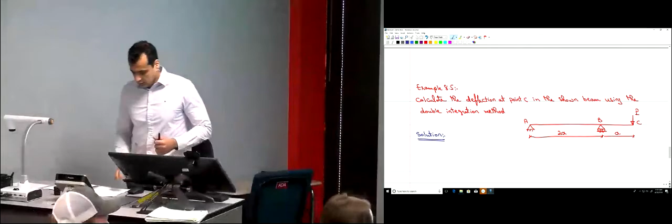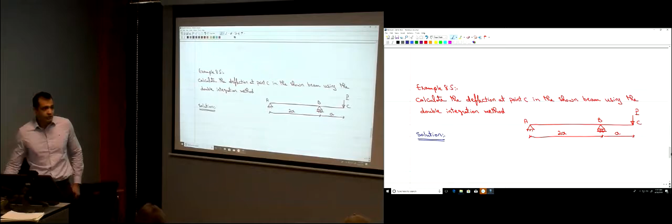Okay, so good morning, everyone. Today, in our last lecture, we're going to finish how to calculate the deflection in beams. Last time we started the double integration method. Today we're going to solve one extra example on the double integration method, and then we're going to learn another method for calculating the deflection called the method of conjugate beams.

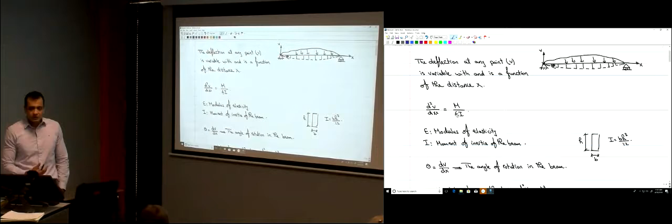So what's the double integration method? Just a reminder, the double integration method is based on this equation: the second derivative of the deflection V at any point is equal to M divided by EI. So you write the equation for the moment, divide it by EI, integrate it once, and you find the rotation theta, the slope, at any point. Integrate once again and you find the equation that gives you the deflection at any point. We did this for two examples last time, and today we're going to solve another example using the double integration method.

So what are the steps? First step is writing the equation for the moment. To write the equation for the moment here, is it just one equation that you need to represent the moment at any point? It's actually two. You need two equations, not just one. Why? If this is the distance x1, any section here has a certain equation, but over here you have a different equation, because here you have a reaction that has to be added. So let's start by finding those reactions first.

So here you have a reaction AY, here you have BY. Definitely there is a horizontal reaction as well, AX, but AX is not going to give any moment, and it's actually 0. So taking the summation of the moments about point A equal to 0, you have here P times its distance to point A, which is 3a, and this should be equal to BY times its distance to point A, which is 2a.

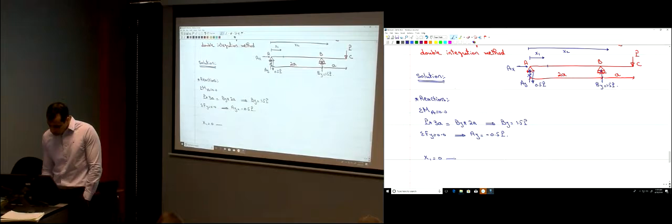So now, let's write the equation for the moment. As we said, you have two locations. For x1 equal to 0 to 2a, you're going to have an equation. And then for x2 equal to 2a to 3a. This is from point A to B, and here this is from point B to point C. You have two different equations. So which equation are we going to use?

Here, what's the equation for the moment from A to B? It's this force, the 0.5P, times its distance x1. So it's negative 0.5P x1. That's the equation for the moment. What about the equation from B to C?

Taking a section over here, it's again the same, 0.5P times x2, so negative 0.5P times x2, but now we have the reaction By, that has to be multiplied by its distance to that point. So we have 1.5P times its distance, which is x2 minus 2a. This distance over here is x2 minus 2a. So now I have two equations for the moment.

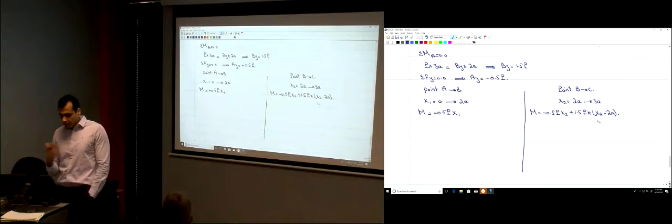So here, theta is equal to the integration of M dx. So it's the integral of negative 0.5Px dx. So how do you integrate this? It's negative 0.5Px squared divided by 2 plus C1, right? And then you integrate it again. V, the deflection at any point, is the integration of that again. So it's negative Px cubed, and with the 0.5 and the half, that's 1/4 times 3, so this is over 12, plus C1x plus C2.

So that's the equation that gives you the deflection at any point. I just forgot something here. It's EI. I have to divide by EI. So here we have 1 divided by EI multiplied by everything. So that's the deflection at any point.

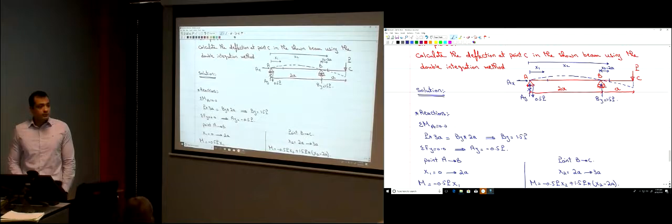When this beam deflects, this point is going to move down like this, and here there is a support that prevents the beam from moving, and here there is a support that prevents the beam from moving. So this is the expected deflected shape. How much is the deflection at point A? There is a support, so it's 0. And the deflection at point B? 0. So those are the two boundary conditions that I'm going to use.

So at x equals 0, that's point A, V is equal to 0. Point A is a support, so it prevents the deflection. So let's plug those numbers. Put V equal to 0 and x equal to 0. So you're going to have just C2. So C2 is equal to 0.

So now the equation for the deflection, V, is 1 divided by EI multiplied by negative Px cubed divided by 12 plus C1x, since C2 is equal to 0. Now I use the second boundary condition.

The second boundary condition at x equal to 2a: the deflection is equal to 0 as well. Why? Because you're at point B where you have a support to prevent the vertical deflection. At point B there is a support. So let's just plug the deflection equal to 0 and then just put x equal to 2a.

So this is 2a cubed divided by 12 plus c1x, which is 2a. So now from this equation you can solve for c1, and c1 is going to be equal to Pa squared divided by 3. That means that the deflection at any point from point A to point B is 1 divided by EI, negative Px cubed divided by 12 plus C1, which is Pa squared divided by 3, times x. This is the equation for the deflection at any point from point A to point B.

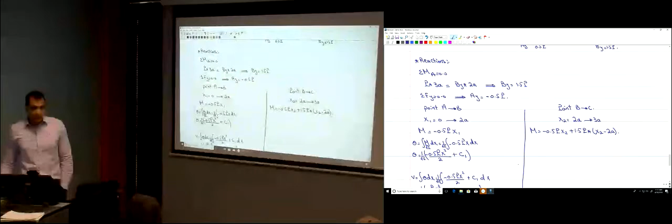So all what we did over here was kind of useless, right? You didn't need all of this. So actually it's not useless. We're going to see that it's not useless in a moment, but it seems useless now. Actually what you need to do is integrate the equation from point B to point C. So now we have this moment. We need to integrate it.

So theta is the integration of M divided by EI dx. This is theta in the segment from point B to point C. So this is equal to 1 over EI times the integral of negative 0.5Px plus 1.5P(x2 minus 2a). I just put x instead of x2, dx.

So 1 divided by EI, and let's do the integral here. We have Px squared divided by 2, so that's 4. Negative Px squared divided by 4 plus 1.5Px squared divided by 2, and then minus 3Pax. That's the integral over here. Anything left? Anything missing? Constant. So plus C3, a third constant.

And then let's find the deflection. The deflection is the integration of theta dx. So that is equal to 1 divided by EI, and then the integration over here. Let me write it on a new line. 1 over EI, and then let's integrate it term by term. So negative Px cubed divided by 12, plus 1.5 is just 3 divided by 2, so it's 3 divided by 4, and here we have Px cubed divided by 3. So the 3 cancels with the 3, minus 3Pax squared divided by 2, plus C3x plus C4.

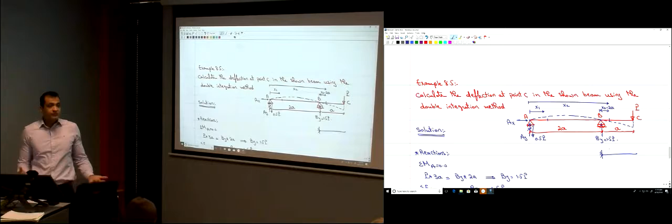Theta at B equals 0? Why? That was when you had a cantilever beam. When we had a cantilever beam, here theta is equal to 0 and the deflection is equal to 0. But this is not a cantilever beam, okay? You don't have a fixed support over here, so the beam is allowed to rotate. There can be an angle of rotation over here, theta. It's not equal to 0.

What's the other boundary condition? If someone says that correctly, I will give him 1 bonus point. But don't look at the book. The deflection at B is 0? Is that what you're looking for? The deflection at B, yeah, we used this already. The deflection at B is equal to 0. You need another boundary condition. What would that be, from B to C? Some piece of information that you know. The slope, the rotation. Is the rotation anywhere here known?

X2 to 2a. X2 minus 2a. It's not between there, is it? X2 minus 2a. This is the point here. What about it? Do we not know? I guess we don't. Theta times LBC. Is it theta times the length of BC? So theta times the length of the segment gives you the deflection over here. You don't know the deflection over here, but no, again, this is not correct.

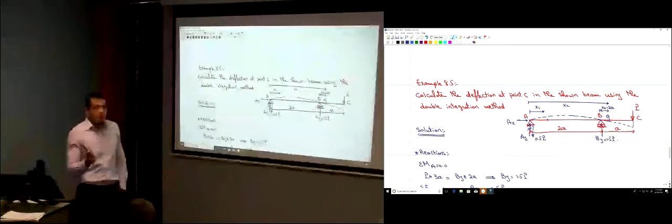My question is, do you know the rotation theta at any point? It doesn't necessarily have to be 0. How would I know this? It's point B. Point B is common between the two parts. I already know the equation for the rotation here. I can use it to find the rotation at point B and then use it here as the boundary condition. Whatever the rotation at point B that I get from segment AB is equal to the rotation in segment BC. It's the same point. I told you this part seems useless, but now I'm going to use it.

I'm going to use this equation for theta. So here, the second boundary condition is theta B from the left part is equal to theta B from the right part. How much is theta B from the left part? It's this equation: 1 divided by EI, multiplied by negative Px squared divided by 4 plus C1, which we found as Pa squared divided by 3. And at B, x is equal to 2a, so I have to substitute x equal to 2a in this equation.

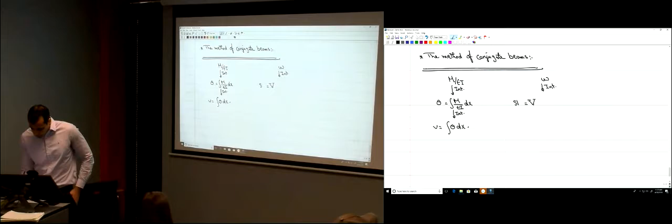Sure. Exactly. So when we had W, a load on the beam, when you integrate it, you find the shear, capital V here. Don't mix those together. The capital V is not the deflection. This is the shear. It's just the integration of negative W dx, right? And then you integrate it again, you get the moment M, which is the integration of V dx.

It's the same process, exactly the same thing. If you know M, you integrate it, you find theta. If you know W, integrate it, you find the shear. You know theta, you integrate it, you find the deflection. You know the shear, you integrate it, you find the moment. It's the same relationship, okay?

So, since it's the same relationship, what if I treat the moment as a load on the beam and draw the shear for this new load? This shear represents theta. If I draw the moment for that new load, I'm getting the deflection, right? So there is an analogy between them.

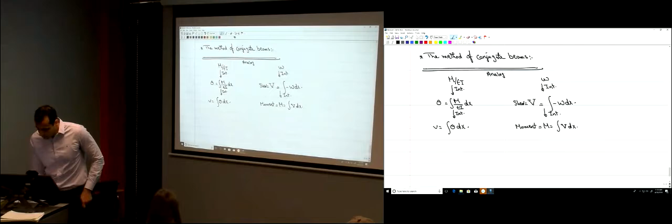Assume that the bending moment that you have is a load. Then draw the shear for that load, you're finding theta. And then find the moment for that load, you're going to be finding the deflection. So that's the method of conjugate beam. Let me write this here.

So draw M divided by EI, and then consider this bending moment drawing that you have as a new load on a new beam. We're going to call this a conjugate beam. So we're having a new beam.

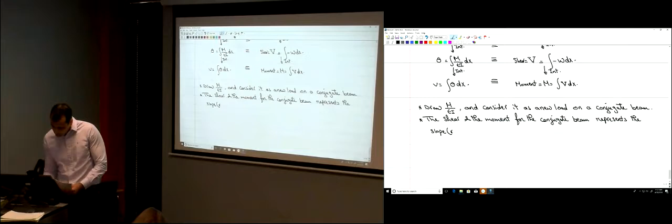And then the shear and the moment for the conjugate beam represent the slope or the rotation theta and the deflection v. It's that simple. Okay?

So let's see an example. We're going to solve two examples. The first example is example 8.14 in the textbook. We have a simple beam; we'll start with the simplest thing. At this point we have a load of 8 kilonewtons, and the dimensions are 9 meters and 3 meters. These are points A, B, C. We're given E is 200 gigapascals, and I is 60 times 10 to the power 6 millimeters to the 4.

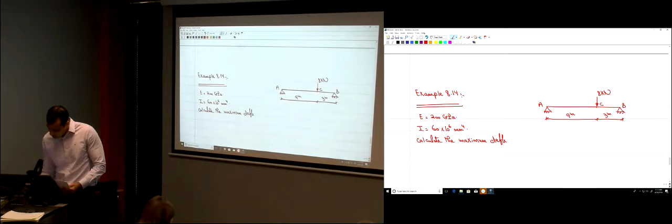And we're required to calculate the maximum deflection in the beam using the method of conjugate beams.

So how can we do this? What does the method of conjugate beam say? It says draw the bending moment diagram. That's the first step. And then consider this bending moment diagram as a load. So let's start with the first step. We need to draw the bending moment diagram for this beam.

How to draw the bending moment diagram for this beam? I'm not interested in drawing the shear, I just want to draw the bending moment diagram here. How can you draw the bending moment diagram? You've learned this throughout the semester. You have to find the moment at the critical points. What are the critical points? A and B, the start and the end of the beam. How much is MA and how much is MB? 0. And what else? What are the other critical points?

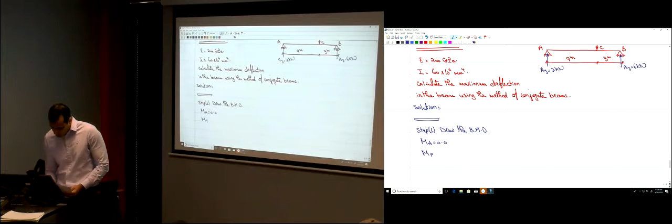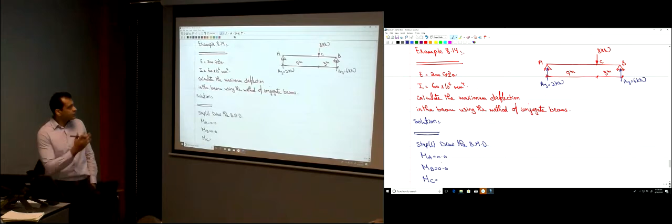So step 1, draw the bending moment diagram. To draw the bending moment diagram, we're calculating the moment at the critical points. MA is equal to 0, MB is equal to 0, and MC. Can someone tell me how much is MC? You take a section at point C and then calculate it from the left part or the right part. How much is MC? If you take that long to find MC, that's a problem. How much is MC? 18.

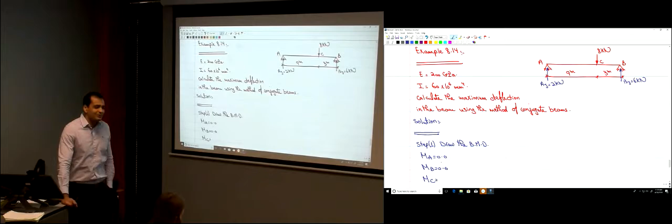You take a section over here, so it's 6 times 3. Or you take a section and consider this side, it's 2 times 9, it's 18. So MC is 18 kilonewton meters. So now let's draw the bending moment diagram. Here the moment is 0, here it's 0, at point C it's 18 kilonewton meters. This is the bending moment diagram.

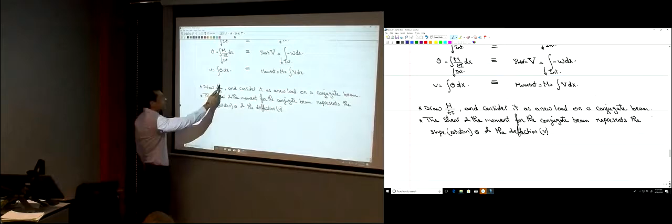Now, look, the whole method of the conjugate beam is described in those 2 lines. Draw the moment and divide it by EI. Did we draw the moment? Yes, we just have to divide it by EI. It's the same moment, but just 18 divided by EI. And then consider it as a new load on the conjugate beam. So this is not a bending moment anymore, this is a load applied on a new conjugate beam, not the real beam. We're done with the real beam.

Once we have the conjugate beam, the shear for this conjugate beam represents what? Is it a shear? No. The shear is the rotation, theta. The moment for this conjugate beam, is it a real moment? No. It's the deflection. That's the method of the conjugate beam. The only thing you have to take care of: when we did this analogy, with M divided by EI, there was a negative sign here and no negative sign over here. So M divided by EI has to be equivalent to negative W.

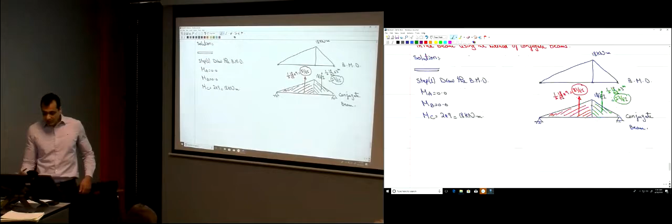Now I have this beam with those 2 loads. Can you tell me the distances of those loads? How much is this distance? 6 meters. And how much is this distance?

2 meters. So how much is this distance? The total length of the beam was 12, so this is 10 meters. Okay? Now we have new reactions. We have a reaction here, AY and BY. Do you know how much is AY and BY?

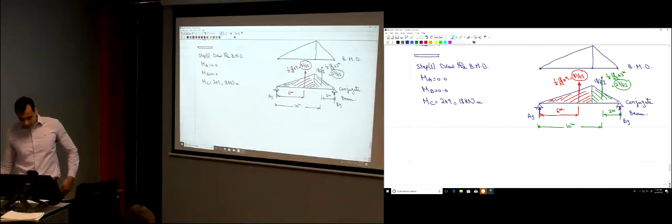Someone would say, yeah, we calculated this before. It's 2 kilonewtons and 6 kilonewtons. No, that is a completely different beam. That's the real beam. Now we're talking about the conjugate beam. You have to find AY and BY on the conjugate beam. Okay? So just take the summation of the moments about point A. Okay? So now just to be precise, let me write this so that you can study from it.

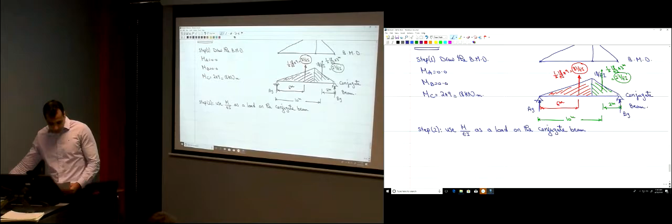Step 2, okay? Use M divided by EI as load on the conjugate beam, okay? So taking the summation of the moments about point A equal to 0, you have 81 divided by EI times 6 plus 27 divided by EI times 10 minus BY. Let me put it like this so that it's downwards and downwards. So minus BY times 12 equal to 0.

So BY is equal to 63 divided by EI. So this is 63 divided by EI. And then the summation of the forces in the y direction is equal to 0, so you can find AY. So AY is going to be 45 divided by EI. So now I know how much is this. It's 45 divided by EI. Okay? Those are the reactions on the conjugate beam. Now, let's see step 3. What's step 3 and step 4?

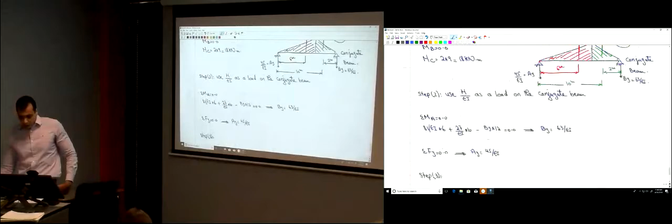The shear on the conjugate beam is the slope, the rotation. Okay? So let's draw the shear force diagram. So here the slope theta is the shear. The shear force diagram here represents theta. Okay? So how would you draw the shear force diagram? You start from the left, okay?

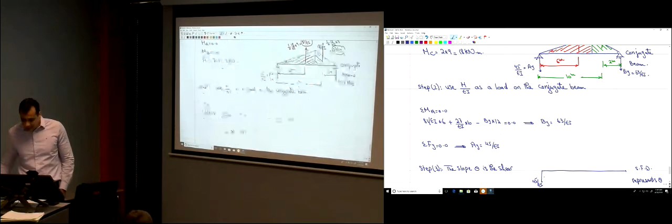AY is going downwards, it's 45. You go down, 45 divided by EI. And then you have this load going up, okay? How much was it? It's 81. So I'm going to go from 45 up, 81, and then I'm going to go up again with 27, okay? And then here I'm going to go down with 63 divided by EI. That's point B here. This is how you draw your shear force diagram.

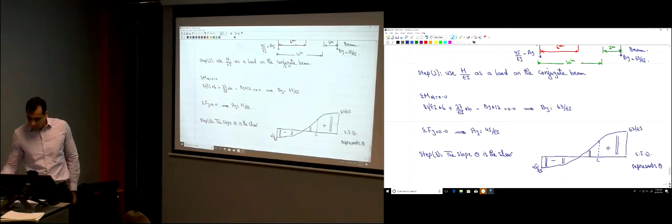Now, if I ask you, how much is the rotation at point A? This beam would deflect like this, right? There is an angle of rotation here, theta A. There is an angle of rotation here, theta B. How much is theta A? How much is theta B? Theta A is the shear at point A on the conjugate beam. So it's negative 45 divided by EI. That's theta A. How much is theta B? It's this value, 63 divided by EI.

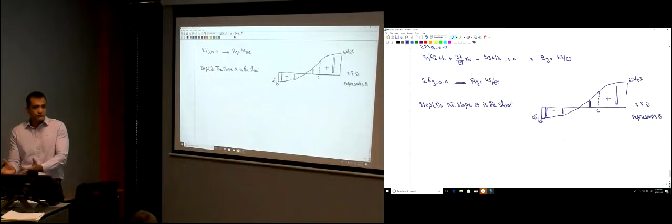How much is theta C? This thing. Okay? So now, this is the rotation. If you want to find the slope at any point, just find the shear at that point, and that's it. And what about step 4? The deflection V is the moment.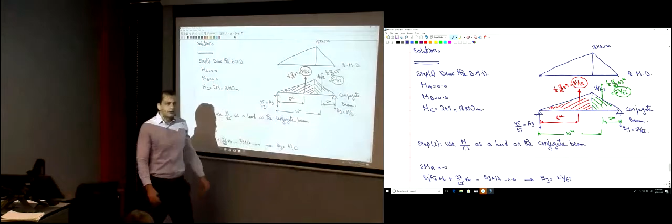Okay? So how would the bending moment look like? The bending moment for the conjugate beam. You have a beam with those loads applied. The moment here is 0, the moment here is 0, right? Would it increase or decrease? From the shear, you have negative shear, so it's going like this. And here you have the shear equal to 0. So here you're going to have the maximum bending moment, and then it's going to decrease.

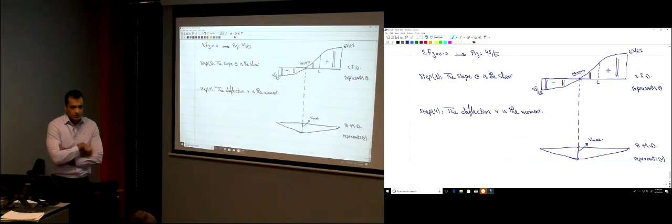So here you have M max, or I'm going to call it V max, the maximum deflection. Where would the maximum deflection happen? Where theta is equal to 0. So where's that point where theta, or the shear on the conjugate beam, is equal to 0? That's where we find V max. Is it at point C? Is it right at the middle of the beam? How can we find the point where theta is equal to 0?

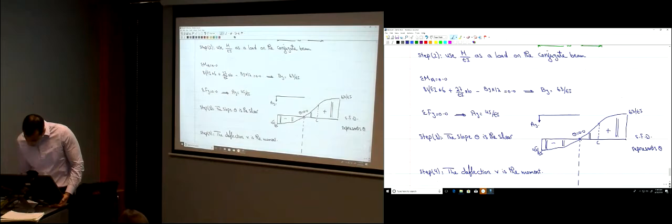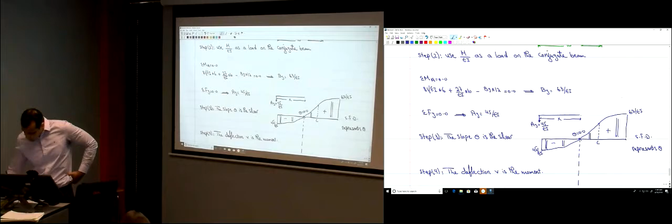Let's take a section at that point. So here you have AY, which was equal to 45 divided by EI. I don't know the distance from point A to the point where theta is equal to 0. Okay? We had a load. How much is the intensity of that load at that point? The intensity of the load at point C was 18 divided by EI.

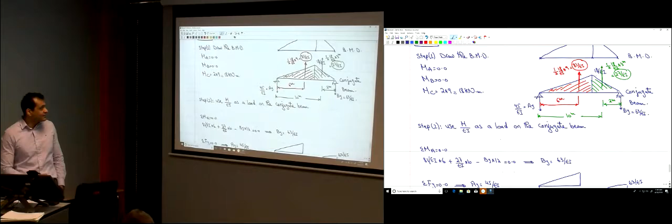So at point C, the intensity is 18. This distance is 9. So if we're at the distance x, how much would the intensity be? 18 divided by 9 multiplied by x. So the intensity over here is 18 divided by EI divided by 9, multiplied by x. So the intensity is 2x divided by EI.

Okay? Now, how much is this load? This load is equivalent to a load that is going up, and it's a triangle load, so it's 1/2 the base times the height. So 1/2 the base. How much is the base distance? X. And how much is the height? 2x divided by EI. So that's the load over here.

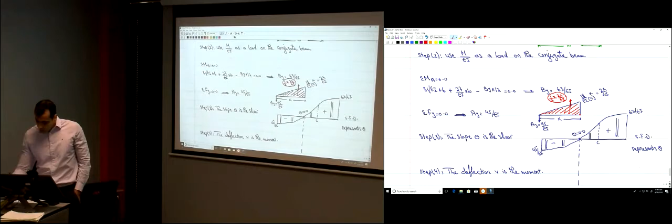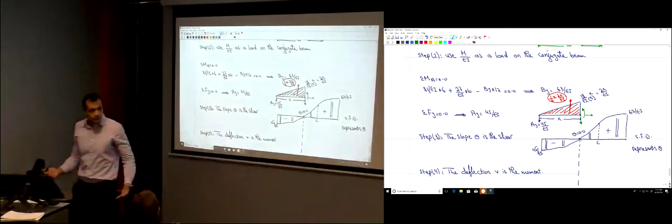Okay? I took a section over here at this point. So there is a shear force, there is a moment, and there is a normal force, right? At this point, how much is the shear? 0. For this shear to be 0, those two forces have to be equal and opposite in magnitude, right? So at the point where the conjugate shear, not the real shear, the conjugate shear is what? Is theta, okay? Is equal to 0, the deflection is the maximum.

So just equate those two forces. AY, which is 45 divided by EI, has to be equal to that force, which is x squared divided by EI. So therefore x is equal to square root 45, so it's 6.71 meters. That's the point where the maximum deflection is going to be. Okay?

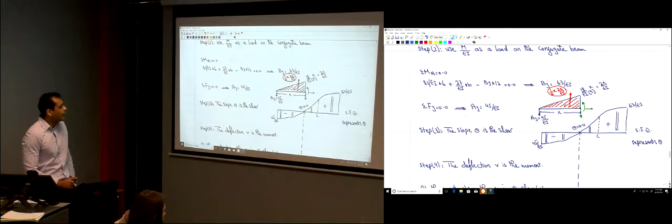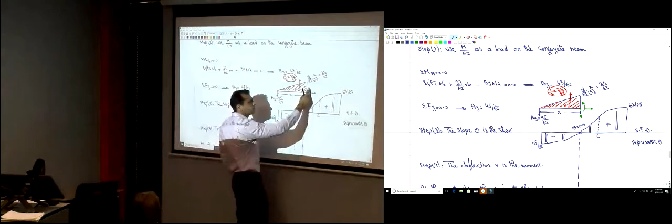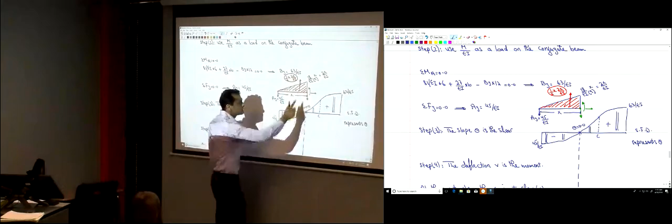So now, I know the location. I need to find the deflection at that point now. What's the deflection? The deflection is the moment. Can you find the moment at that point? Can you find how much is this moment? 45 times x, okay? It's negative plus this force, which is x squared divided by EI times this distance. How much is this distance? One-third x.

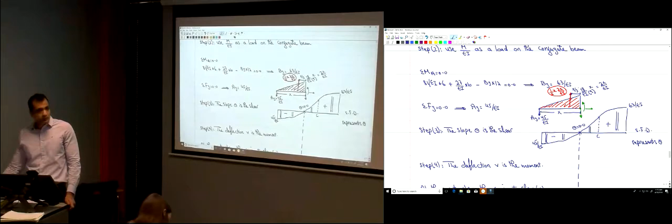Okay? So now, M maximum on the conjugate beam is equal to the maximum deflection. I'm going to call it Vmax. So Vmax is equal to negative 45 divided by EI times the distance x, which is 6.71 meters, plus the force, which is x squared divided by EI times x divided by 3. So it's negative 201.2 divided by EI kilonewton meter cubed. Okay? That's the maximum deflection.

So Vmax, the only step left here is how much is EI. So here this unit is kilonewton meter cubed. E was given in the problem statement, it's 200 gigapascals. So I have to use the same units here. What's a gigapascal? It's 10 to the power 9 pascals. What's a pascal? It's Newton per meter squared. I cannot use Newton. I want to use kilonewton. So I'm just going to divide by 1,000. So instead of multiplying by 10 to the power 9, I'm just going to multiply by 10 to the power 6, to change the gigapascals to kilonewtons per meter squared. So that now is in kilonewtons per meter squared times I, the moment of inertia.

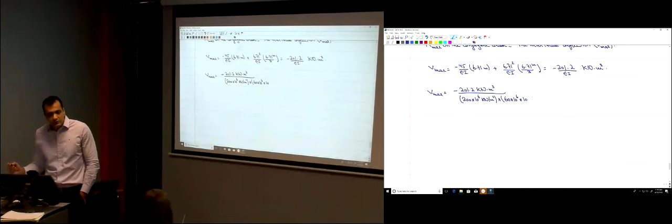The moment of inertia was given as 60 times 10 to the power 6 millimeters to the 4. Can I use millimeters to the 4? Are the units consistent? No, I have to use meters to the 4. So how to change from millimeter to meter? Divide by 100. But now I'm changing from millimeter to the power 4 to meter to the power 4. So I'm dividing by 100 to the power 4. So 10 to the power negative 8. Just multiply by 10 to the power negative, from meter to millimeter, this is not 100, this is 1,000. So 1,000 to the power 4, that's 10 to the power 12. Okay, so 10 to the power negative 12.

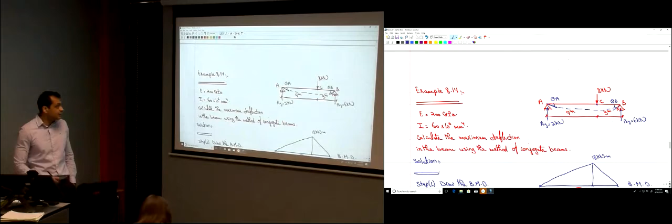So now we're going to have the deflection equal to negative 0.0168 meters. Or multiplying by 1,000, it's negative 16.8 millimeters. That's the maximum deflection. The maximum deflection is not at point C. As you see here, the maximum deflection was not at point C. You had to find the location for the maximum deflection where the shear is equal to 0. Which shear? The shear on the conjugate beam. Any questions?

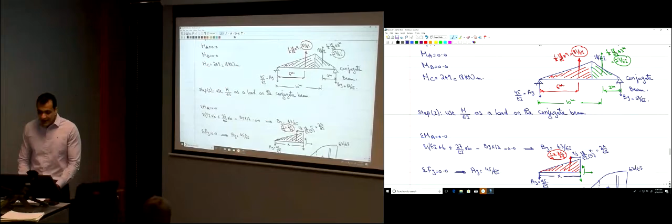Okay, so now, a very, very important topic, before we solve the other example. When we drew the conjugate beam, the real beam was a simply supported beam, and we drew a simply supported conjugate beam. So does the conjugate beam always look the same as the real beam? No. There is a table that tells you what the conjugate beam looks like. So let's see this table. So now, what does the structure of the conjugate beam look like? So here, there is this table. I'm going to give it to you on the test, by the way. So the real beam and the conjugate beam.

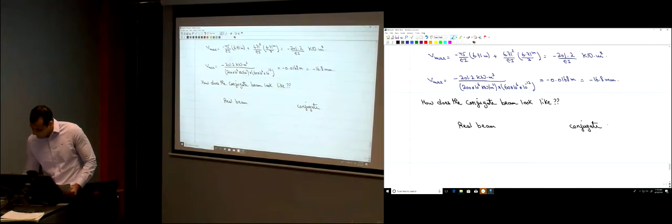If you have a pinned or roller support at the end of the beam. It has to be at the end of the beam, okay? Then in the conjugate beam, it's going to remain the same, okay? Pinned or roller support at the same location. So that's the first case here.

And then, if you have a fixed support in the real beam, on the conjugate beam that becomes a free end. Why is that? Because when you have a fixed support, how much is theta at the fixed support? How much is the deflection? 0. So the moment and the shear on the conjugate beam have to be 0. How would you ensure that? If it's a free end, the shear here is going to be 0, and the moment here is going to be 0. It has to be a free end on the conjugate beam. Okay?

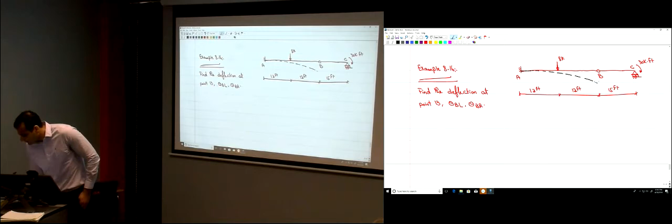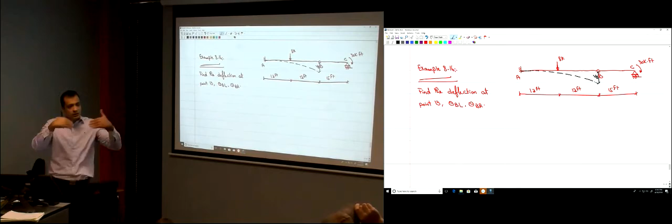It's the same point. How come there are two different rotations at point B? Because there is an internal hinge. When this beam deflects, it's fixed over here, and then it can deflect like this. So this is vB, the deflection at point B. At an internal hinge, both parts can rotate independently. So here you have theta B left, and here theta B right. Completely different angles on both sides, because the hinge allowed this to happen.

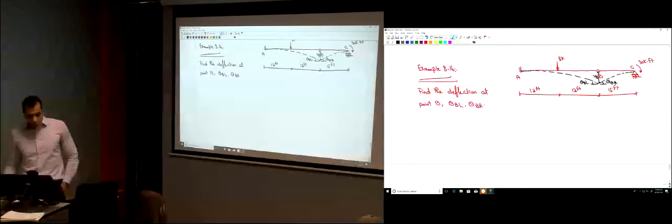So now, how can we do this? Using the method of conjugate beam. What are the steps? Draw the bending moment diagram, consider it as a load, put this load on the conjugate beam. The shear for this conjugate beam is the rotation, the moment is the deflection. That's it. So step 1 here, draw the bending moment diagram.

To draw the bending moment diagram, I'm going to draw the free body diagram first for each part. Here I have 8 k. This is a fixed support, so there is Ay, there is MA, and there is Ax, which is going to be 0. Here we have a vertical force By, and here a vertical force Cy, and this is 30 kip-feet. So here we have a By that is equal and opposite to that By. This is the free body diagram for each part. I just broke it at the hinge.

Now solving over here, taking the summation of the moments about point B equal to 0, you're going to find CY. So CY is going to be 30 divided by that length, which is 15, so it's going to be 2K. And then the summation of the forces in the Y direction equal to 0, you're going to find BY, it's equal and opposite to CY, so it's 2K as well. And then this one is the reverse of it, okay?

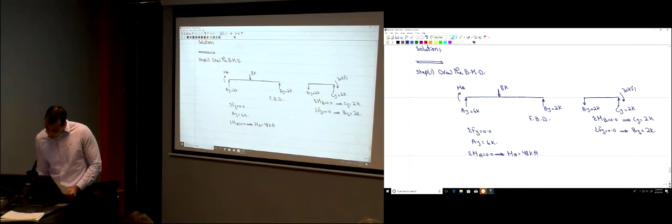And then here the summation of the forces in the Y direction is equal to 0, so AY is equal to 6K. And then the summation of the moments about point A is equal to 0. You're going to find MA is going to be equal to 48 kip-feet. I'm just finding the reactions, nothing more than this, okay?

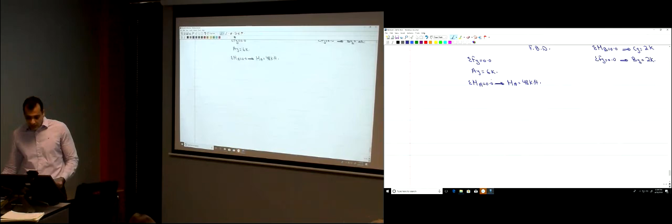Now I would like to draw the bending moment diagram. How would I draw the bending moment diagram? Find the moment at the critical points. I'm going fast here because we're just repeating the steps that we did earlier many times. This is point A, B, C. What are the critical points here? There is point D here, where there is a load applied.

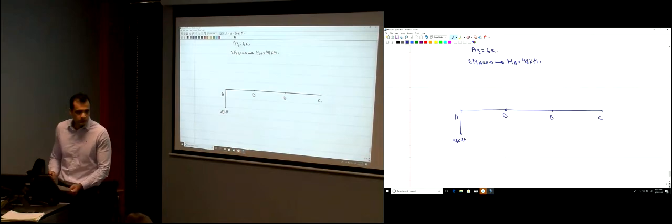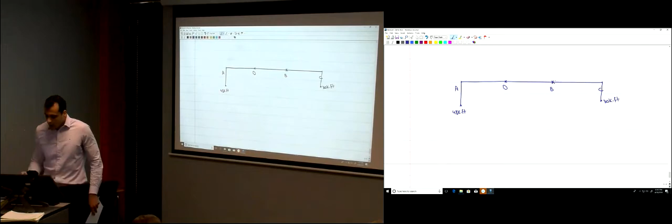So the moment at point A is negative 48. The moment at point B, there was a hinge, so the moment here is 0. Point C, you had a concentrated moment here of negative 30, so MC is negative 30, it's not 0. So negative 30. And here it's 0. So from B to C there is no load, so you have a straight line.

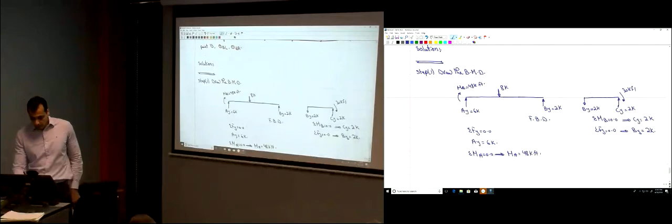How much is the moment at point D? This is point D here. Take a section and study this part. It's 2 times this distance. How much is this distance? 12 feet. So that means that MD is 2K times 12 feet. So it's 24 kip-feet. It's positive. So now this is 24.

I'm just going to connect them with straight lines because this is how the bending moment diagram looks. This is the bending moment diagram. What would you do with this bending moment diagram? Divide it by EI and consider it as a load. So I'm just going to divide it by EI and treat it as a load on the conjugate beam.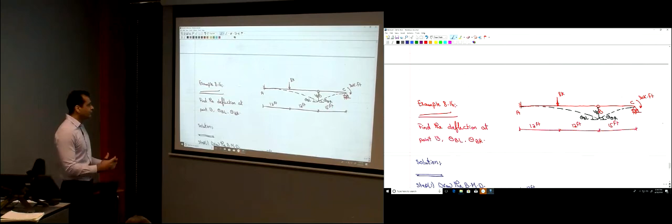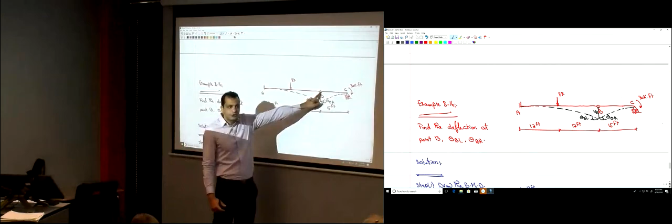How does the conjugate beam look? It depends on how the original beam looked. You had a fixed support here. On the conjugate beam, this becomes what? Free end. You have an internal hinge here. On the conjugate beam, this becomes what? Pin support. You have a pin support at the end. It stays the same, okay?

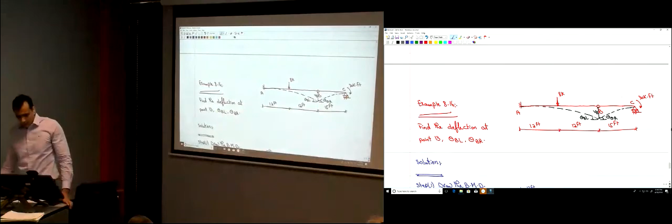So the conjugate beam looks like this. It's a free end here. You have a support here and a support here. What's this? It's an overhanging beam with this load applied on it. So we have an overhanging beam that looks like this with those loads applied on it.

So now we would like to find the deflection at point B. The deflection at point B is the moment at point B. The deflection VB is equal to MB. How can you find the moment at point B? Just take a section at point B over here and study this part. What are the loads that we have here? We have those distributed loads, so I have to find the equivalence of them. How much is this load, this load, and this load?

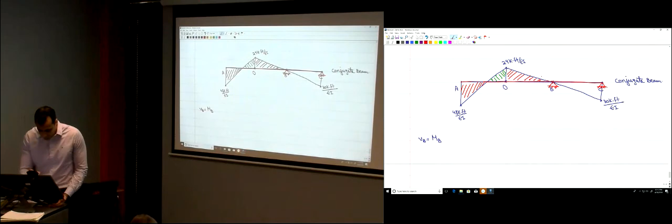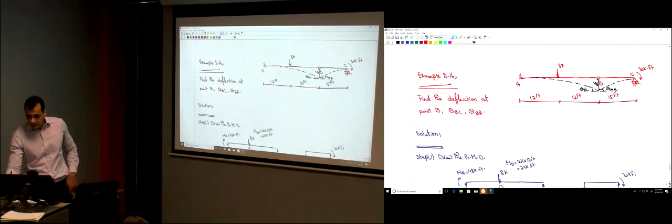So this one is going downwards. It's 1/2 48 kip-feet divided by EI times the length. How much is this length? From A to D, the length was 12 feet. This is point D. So now this is 48, this is 24, so this is 2/3 of the 12 feet. So this is 8 feet. So it's equal to 192 divided by EI.

How much is this green force? 1/2 the height times the base, which is 4 feet. So this is equal to 48 divided by EI. How much is the red force here? 1/2 the base. How much is the base? The distance from D to B, it's 12 feet, times the height, which is 24 divided by EI. So that is equal to 144 divided by EI.

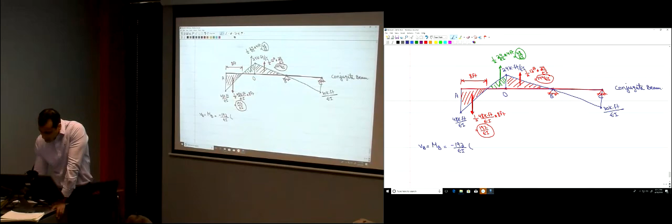Okay? So now I can find MB. MB is this force times its distance, this force times its distance, this force times its distance to the point. So MB is equal to, the first force is negative, so negative 192 divided by EI times its distance, which is, from D to B, it's 12. So here you have 12, and then you have 4, and then you have 2/3 of 8. So 12 plus 4 plus 2/3 of 8,

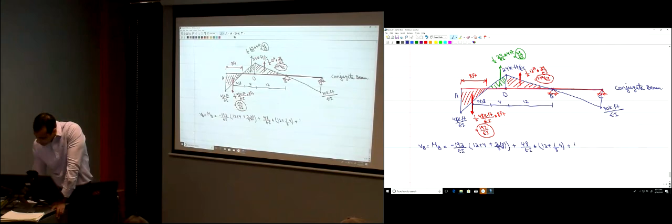plus the other force, which is 48 divided by EI times its distance, which is 12 plus 1/3 of 4, plus the third force, which is 144 divided by EI multiplied by its distance, which is 2/3 of the 12 feet. So this is equal to negative 2304 divided by EI. That's the deflection at point B. It's the moment at point B.

Okay? And then we need to find theta B left and theta B right. What's theta B left and theta B right? It's VB left, the shear at point B left, and the shear at point B right. How much is the shear here? It's the summation of all those forces, right? If you take a section here, the shear from equilibrium is going to be equal to those three forces. Okay?

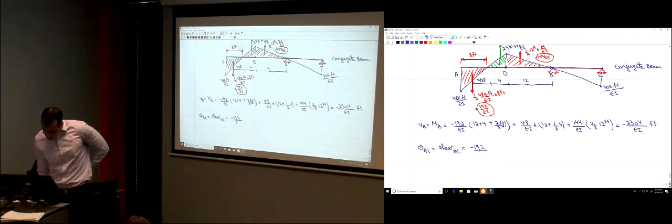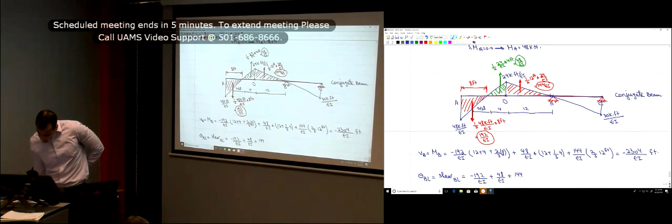So theta B left is equal to the shear at B left, which is equal to negative 192 divided by EI plus this force, which is 48 divided by EI, plus the third force, which is 144 divided by EI. So that is equal to 0.

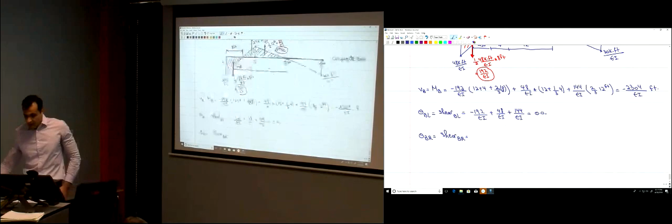Okay? And then theta B right is equal to the shear at B right. So what's the difference between the shear at B left and B right? What's the difference between the shear at those two points? It's this reaction. So you have to calculate this reaction. I'm not going to go through how to calculate it. You know how to calculate the reaction. Just take a moment about point C and don't forget this force. So there is a force here.

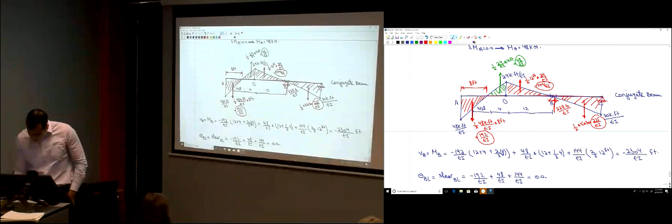This one is going to be 1/2 times 15 times 30. So it's equal to 225 divided by EI. So BY is going to be equal to 228.6 divided by EI. That's BY. So it's equal here to BY, which is 0 plus BY, so it's 228.6 divided by EI. Any question?

I might have been a little bit fast because we're just doing the same thing that we did, okay? It's just about the moment and shear. We did this throughout the entire semester. You just have to know that the shear on the conjugate beam is the rotation. The moment on the conjugate beam is the deflection. That's all, okay? Any question?

Okay, great. So see you next Thursday on the test. Yes, definitely. This is going to be on the final. Most probably you'll get a deflection problem or two deflection problems, one using the conjugate beam, one using the double integration method, influence line, and the truss. So there's 4 questions on the final.

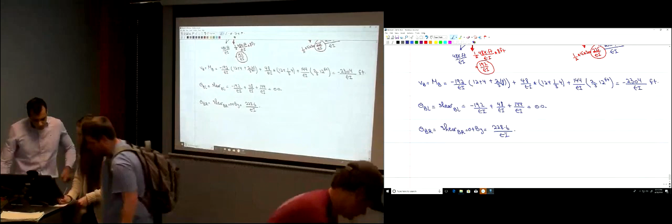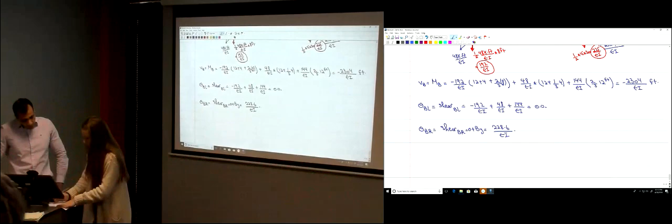Okay. If I'm trying to find, so here's this one right here. And then that's the girder. That's the weight of the girder, 80 pounds per foot. And this is the load of the entire floor, the dead load of the entire floor, distributed over the area of the floor. And then this was the 15 feet. So I'd multiply that by the 15 and put it on top, like this.

Tributary area. Right. And this is 15, right? Right. Okay. So the own weight of the beam is a uniform load of 80 pounds per foot. That's the own weight. And then here you have 166 times that 15. Would I put that on top?